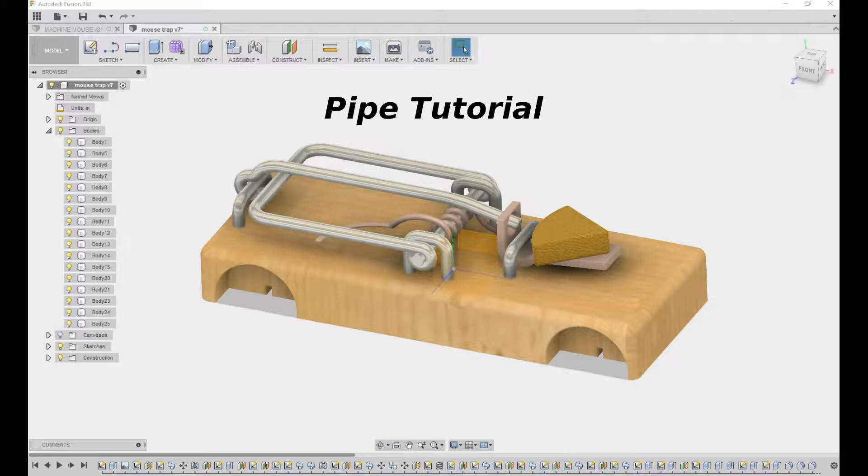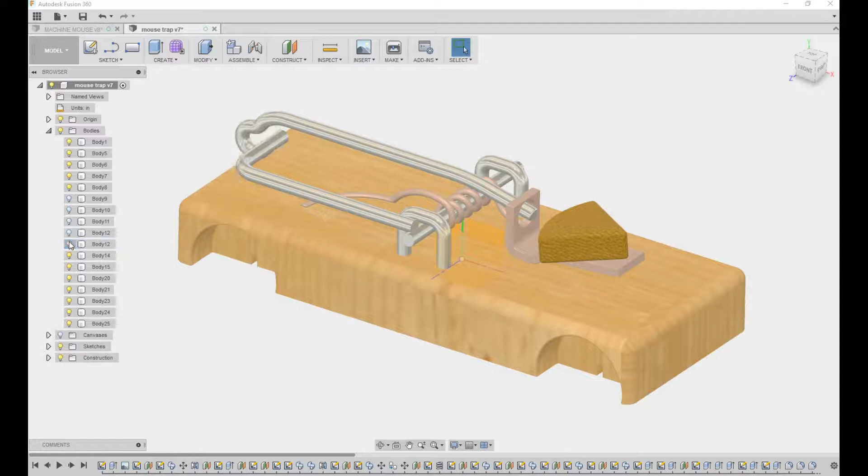Our mousetrap car may look very complicated to make, but it's easy once we break it down into individual pieces. I can turn off each individual piece, and those are the pieces we're going to isolate and machine all at once on a flat surface.

I'm going to make all the pipes on my Chinese 3040 mill, and at the same time work on the base of the car in a larger mill I have. So let's go over to the CAM side and take a look at what we did.

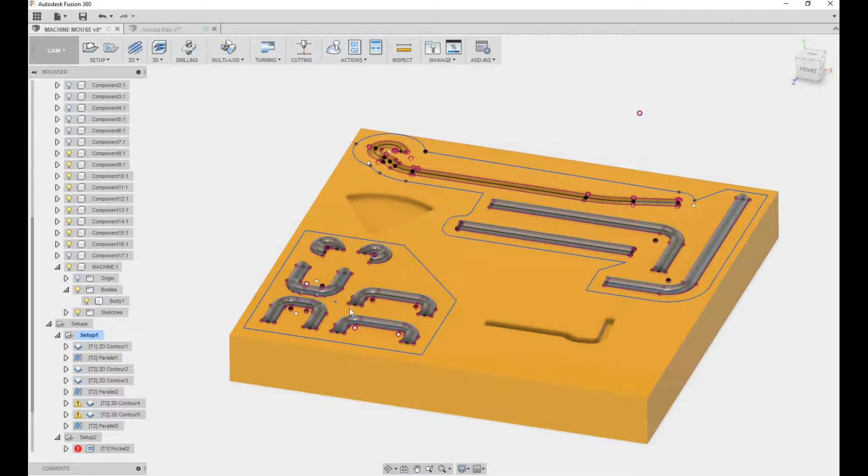I've isolated each component, then aligned it to a solid representing an MDF board that we just clamp down to the table. I'm turning off the components, and I've created a projected sketch around the edges of each component, then offset that in to the center.

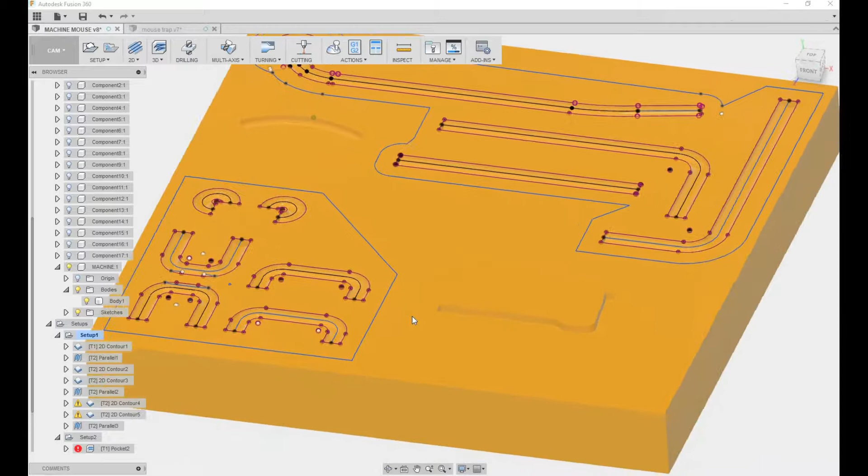The pipes are 3/16 of an inch, so we're going to use a 3/16 ball mill, and we're just going to use an engraving toolpath and drive it down the center of each pipe halfway into the MDF. We have a singular toolpath that will create half of our pipe on this side, and it's just going to step down back and forth halfway down for the pipe.

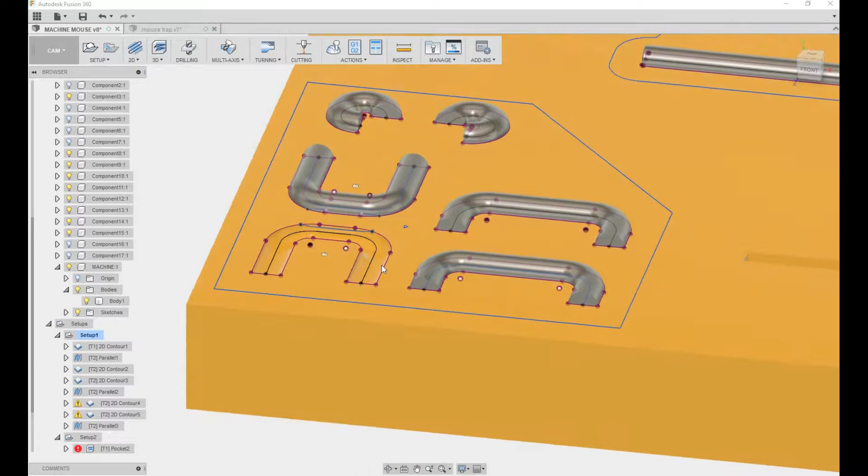Our next toolpath, we're going to turn our pipes back on. After we've cut the individual cavities here for each pipe, we want to take a Q-tip or a small brush and get a little bit of petroleum jelly and coat the inside of our cavity. We want to make sure we coat all the way up to the edges on each side, all the way around. This will be our part release for when we put in car body putty and build this up on top.

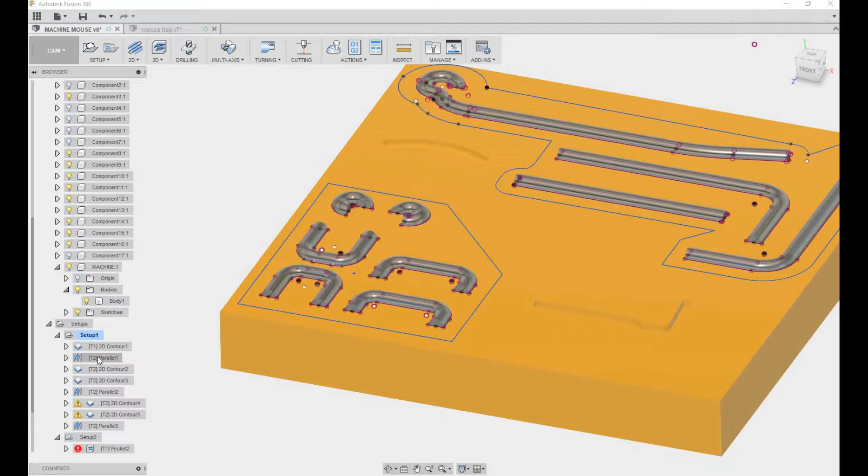Once we've released the inside of each cavity, we're going to build that back up with some car body putty across the top, and then start a parallel toolpath constrained to just around each pipe. We'll do a fast stepover of about 20 thousandths with a flat end mill.

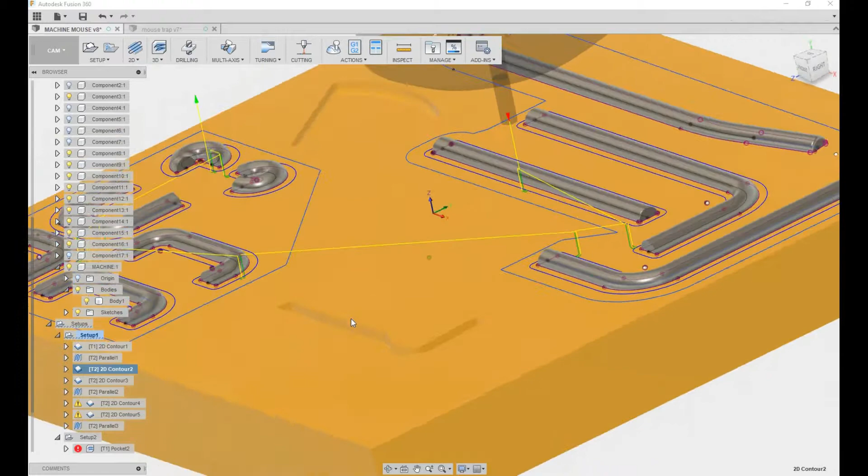We're going to use our same 1/8 inch flat end mill, and drive that around the outside contour of our projected path to clean up this edge so it's square to each pipe. I'm also going to clean up this internal area so it fits over our pipe when we're assembling it and gluing it together.

Now we're going to do the same thing for our cheese. We're going to cut a little bit down into this for the trigger of the trap, and then build that up with a little body putty and cut around the outside.

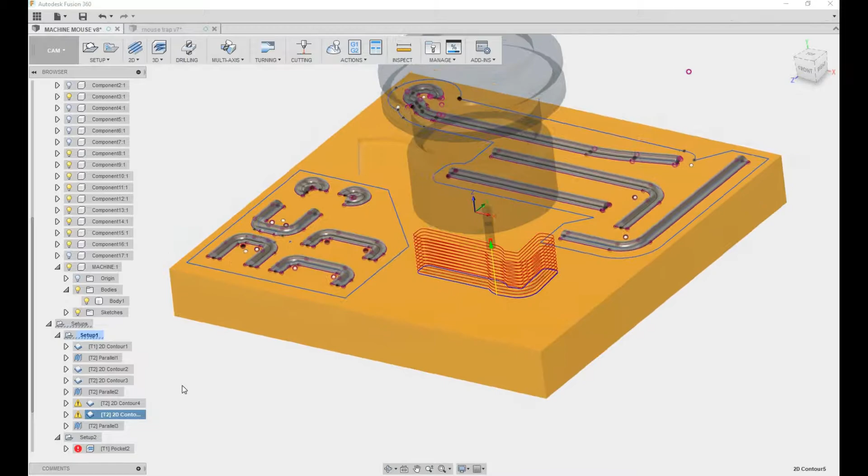While I've got the pipes cutting in my little router, I'm going to set this up in my larger mill. I'm going to use a 3/16 ball mill, and just cut out the wheel wells here with a small pocket routine.

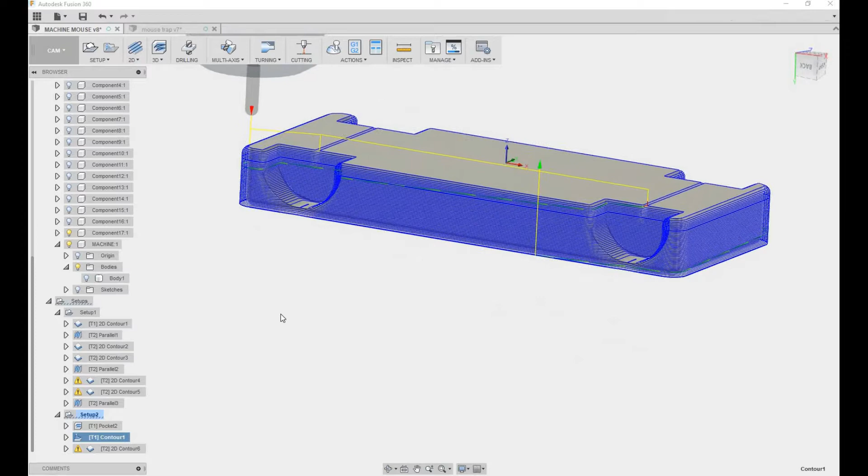Then I'm going to come back in here with a water line to cut around the outside of the car. After that, I'll flip the car over and cut it to height with the larger mill manually. Here you can see I've done a 1/8 inch tool path with a 1/8 inch tool to create the slots for the wheels.